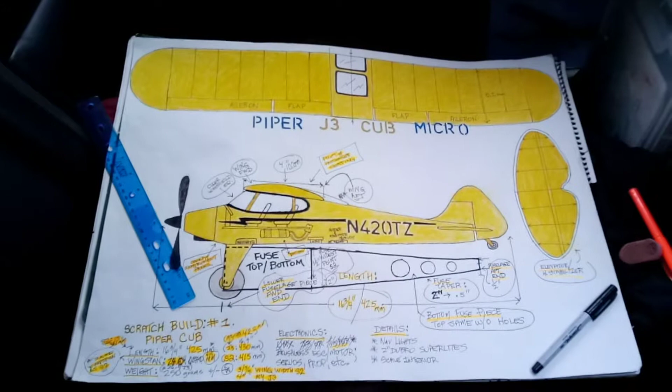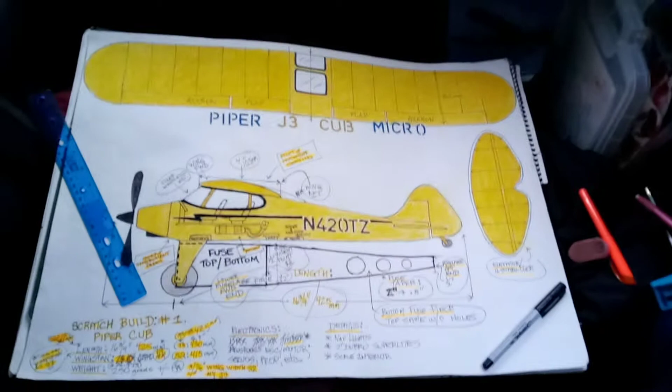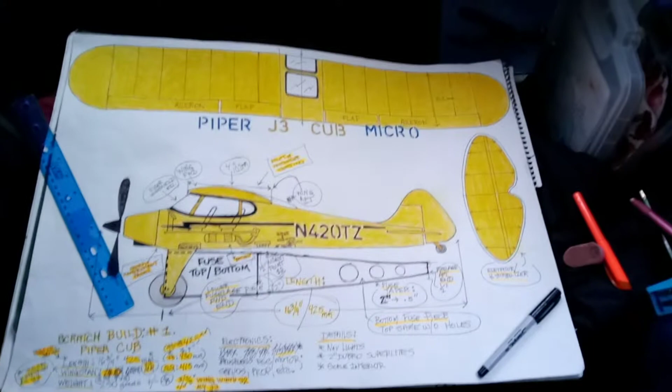What I'm attempting to make is a scale micro J3 Cub, entirely out of balsa with some basswood airframe going on. So the first new thing is I've got the wings colored in, how they're gonna look now. The horizontal stabilizer wings are approximately the color that they're gonna be, approximately J3 Cub yellow, not quite.

All right, so let's come in closer and see what we got going on here at this time. I'll put in simulated little marks there to show that this is gonna be glass. Just like on the J3 Cub, those two windows will be clear glass.

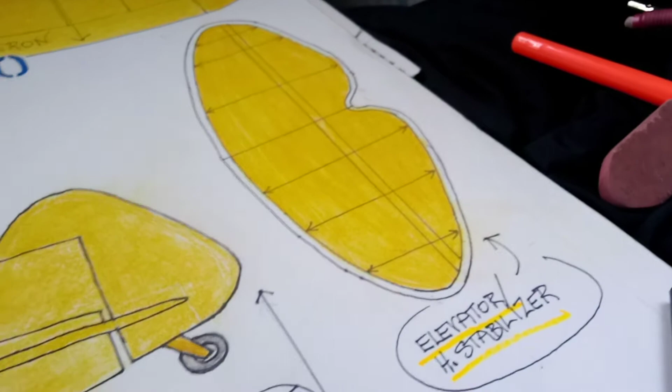One thing I wanted to really emphasize is here's my elevator slash stabilizer right here. Now you can see that I've got an outline here and then an inner part here. The reason for this is to make sure I get things done right, I got to be flexible as I'm building to the size these components are going to be, because the horizontal stabilizer has to be the right size to go with the rudder, and vice versa.

The empennage, the vertical stabilizer and horizontal stabilizer, have to fit the fuselage dimensions and all that kind of stuff. So this is the starting point. When I use this as a pattern to cut out a piece exactly this size and shape out of very, very thin balsa, I'm going to cut out at this outer line first.

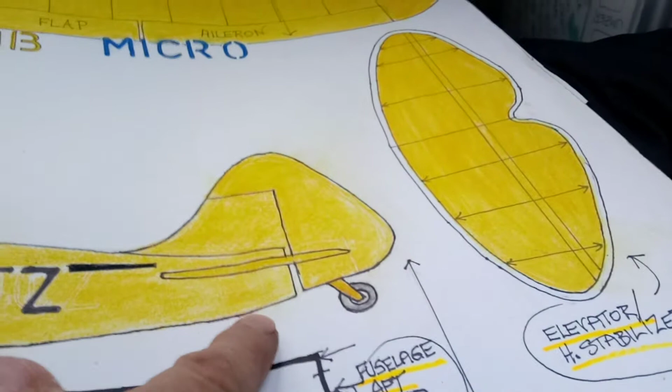I know that this horizontal stabilizer is a bit big, I believe, for the rudder and for the fuse. But that's what I want, because I can trim down. You can see I got this outline here. Well, I can also draw an outline on the inside. I can keep drawing outlines on the inside until I can make it as small as I want.

What I'm going to do is cut it out this size, though. Let me back up, reverse my last statement. I'm actually going to cut this out, the size you see here, to this outer outline, which I know will be oversized with the right shape.

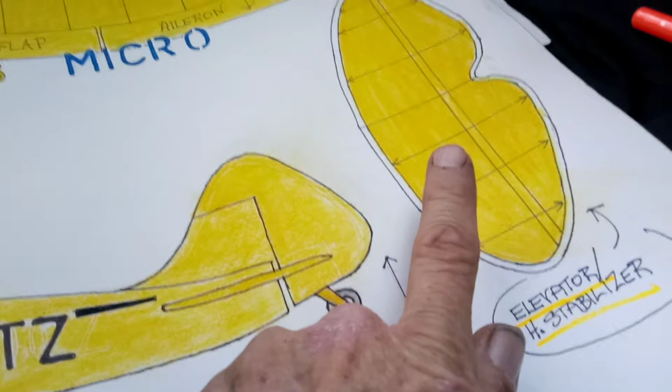And then, after I've got it actually cut out on balsa, and I've got the rudder also actually cut out on balsa, I can put the two together and see if this one needs to be the size it is or smaller, right? That's easy enough. So I wanted to mention that.

If the rudder size turns out to be bigger, I'm gonna build the fuse first. And if my dimensions here for the rudder and vertical stabilizer turn out to be too small after the fuse is built, I can adjust that, make it larger by just drawing new outlines outside of this until it's the right size but the same shape. So it's all flexible and a work in progress.

Okay, so I just want to mention that about starting off with my components being large, and then I can whittle them down just to the right size as I go.

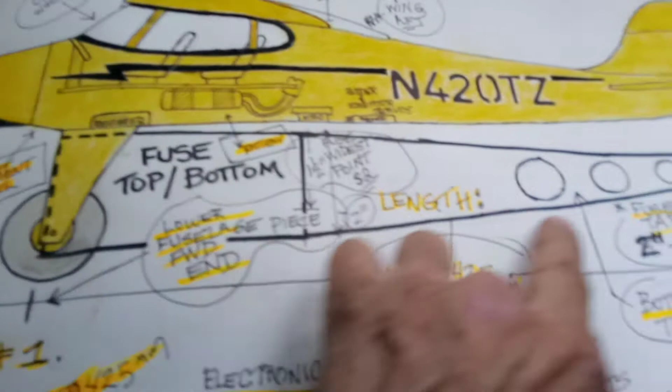Let's see what else. So the next thing is, here's a picture of what the bottom of the fuse will look like, just like a UMX model, underside with the holes for ventilation and making it lighter. And then the top would be the same as this, but without the holes.

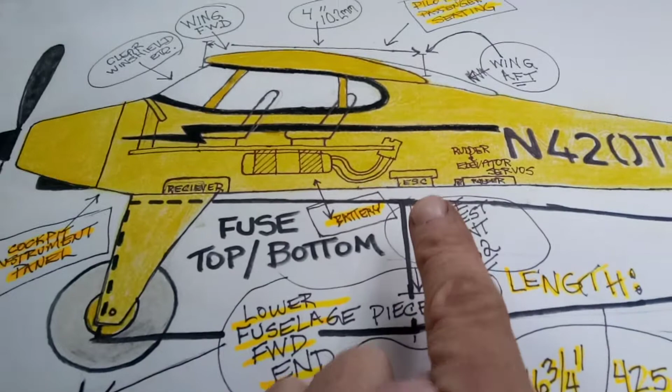And then this part here is where the battery compartment and stuff is going to go, and we can see that here. Here's our battery representation here, battery, all right? So what you see here, this rectangle, is going to be just what it's like under the fuse from there to there. And up in this compartment will be the battery.

First of all, let's back up a little bit. So, pilot and passenger seating, center screen. All right, so we're going to have a piece of balsa flat that goes like this.

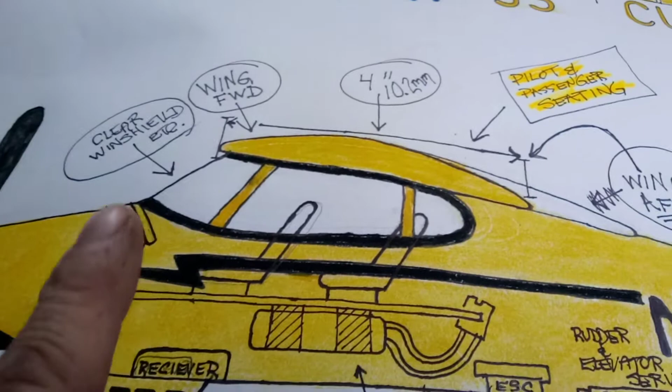And mounted on top of that will be pilot and passenger seating. Also mounted to the top of that will be an instrument panel. There's the panel there, and that's the support. Instrument panel here with instruments on it, not real instruments, but I'll be doing like what Horizon Hobby does.

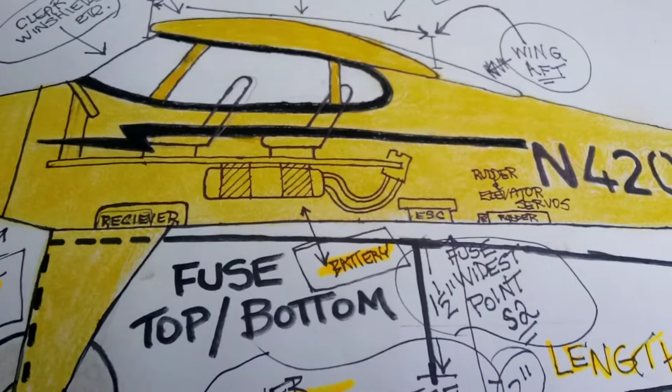They basically get a good drawing of an instrument panel. Can I start over?

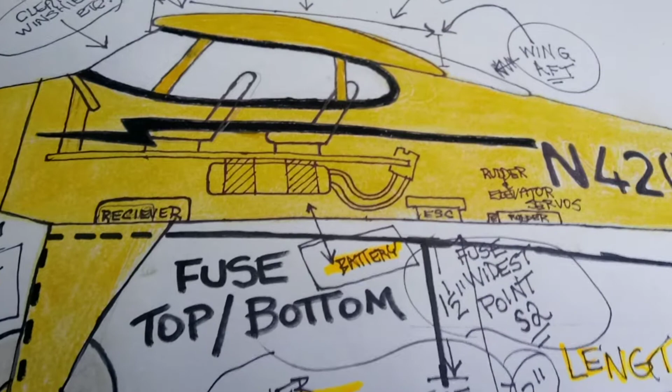I'll get a picture of an instrument panel, photocopy it, shrink it down, print it out on paper, and glue it onto this instrument panel area.

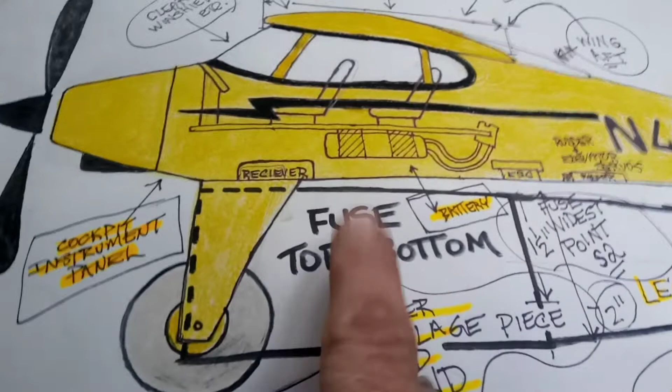So you've got this piece of wood mounted in the plane. You don't move it, and it's got the seats and instrument panel installed. When you open the battery compartment hatch, that's the access to the interior of the plane. Inside, you'll see the receiver mounted up forward, the battery held on with straps, the ESC with the battery plugged into it, and the rudder and elevator servos back here. So that's the deal on that.

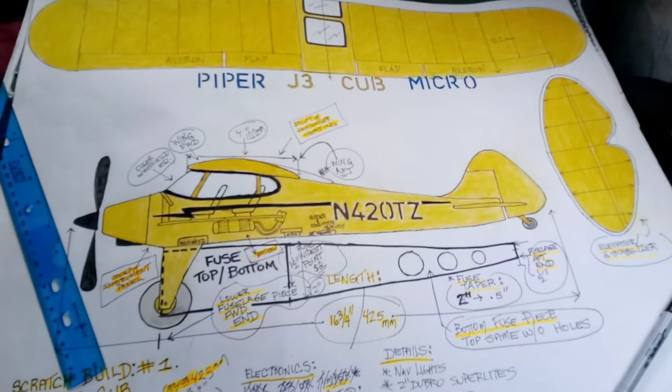So we are so close to starting to actually build this. I mean, really, really close. Now some interesting things I thought I'd point out.

Let's look at the length of the model. The length of my scratch build model is 16 3/4 inches, which is 425 millimeters. So my J3 model is going to have a 425 millimeter length fuselage.

Now the S2, by comparison, has a 415 millimeter length. Let me start over. My model is going to have a 425 millimeter length fuse. The J3 UMX model has a 430 millimeter length fuse, so my model will be 5 millimeters less in fuselage length than the J3.

The length on the S2, by comparison, is 415 millimeters, and mine will be 425. So my model will be 5 millimeters shorter in fuselage length than the J3, and slightly longer than the S2 at 415 compared to 425 — I don't want to do the math in my head. So there you go. My fuselage is slightly longer than the S2 UMX fuselage, and slightly shorter than the UMX J3 fuselage.

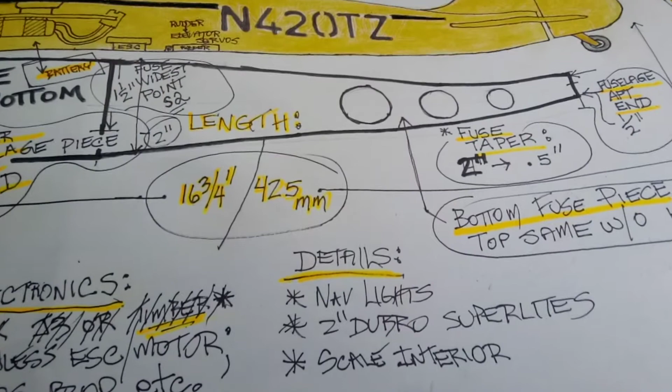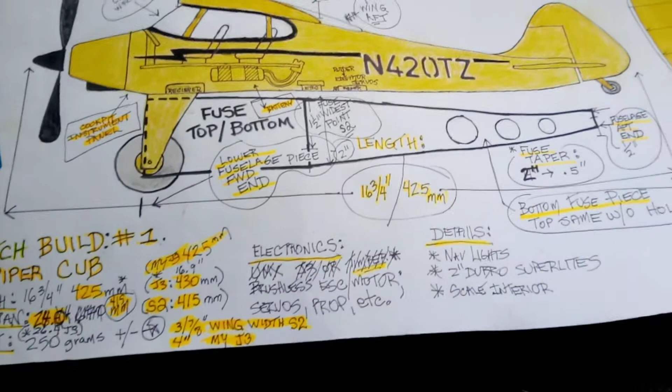I mentioned before that I was going to use UMX J3 or Timber electronics, including the motor and ESC, or possibly a separate brushless ESC motor setup. But I realized I want more power for this plane, and I can put whatever power I want into it. So I'm going to not go with the UMX motor and ESC, because that won't give as much power as I want. I want the model to be a little overpowered, so I can be sure it will never be underpowered.

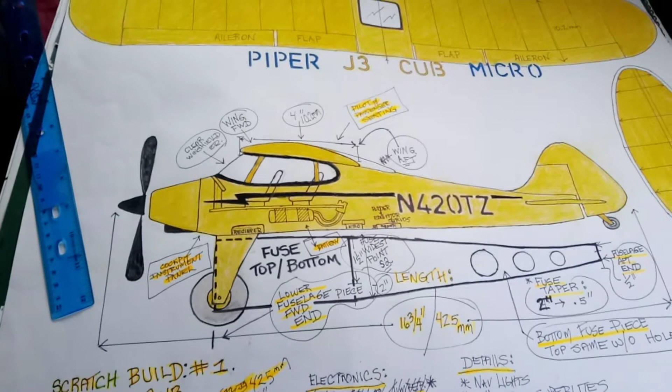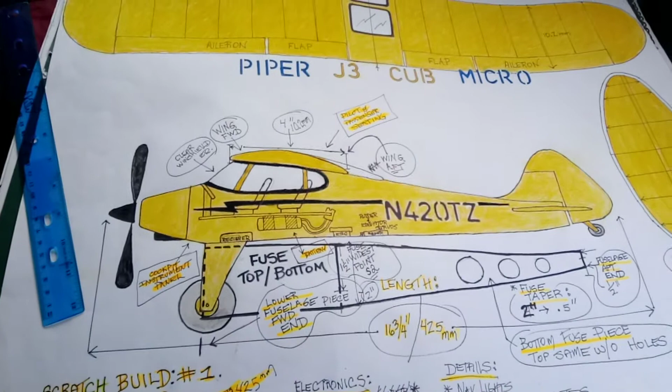So when I get it finished and know the size and weight, I'm going to see how big of a setup I can put in there — ESC, battery, motor — without overdoing it, to give plenty of power. It's going to be definitely more powerful than a UMX model for sure. It's just a matter of how much more powerful.

Okay, what else? Yeah, I think that's the latest. I think that's all on the updates. Yeah, I think I've mentioned everything now.

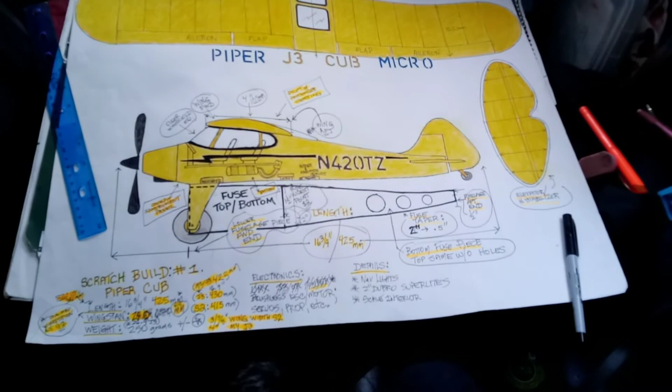So the next video will be — let's see — I'll trace the outline of the wing on camera onto the balsa that's going to be used for it, then cut it on camera and sand it, getting a start toward being finished. I'll show that, and have all the parts traced onto balsa and ready. Then on camera I'll cut the fuselage, the 4 fuselage pieces — left, right, top, and bottom — and show sanding and finishing those, getting them nice and clean and ready for assembly.

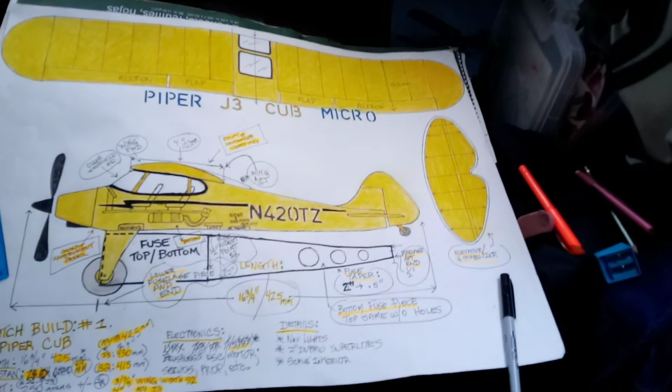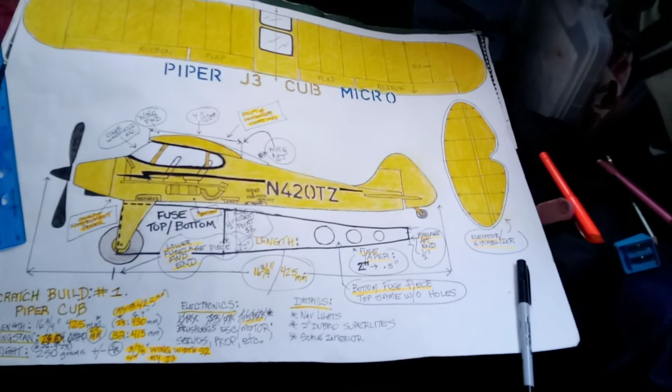Same thing — I'll show cutting this oversized at first, then trimming it down until I get the right size to go with the vertical stabilizer and the fuselage. I'll also show cutting out the windows on the side fuselage pieces. That'll be it for that video, which will be video number 5, I think.

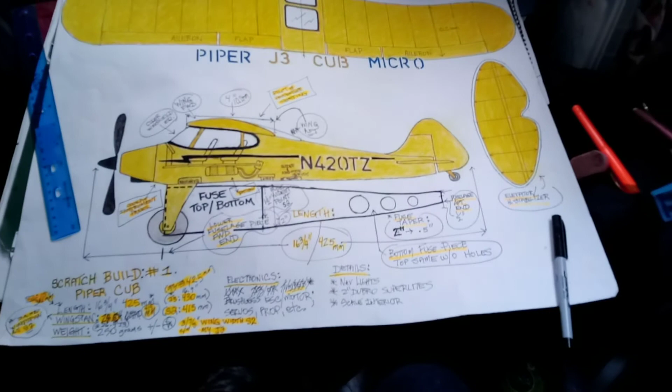After that, we'll build the wing — fully assemble and build the wing in the video after that, and fully assemble and build the fuselage. I will also, at some point, build the cowling, and we'll do the first trial fit.